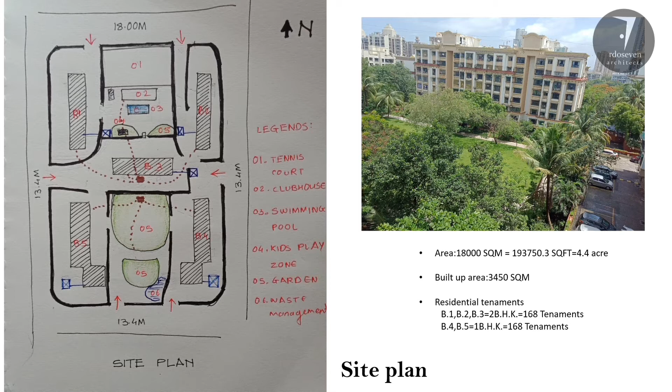The site area is 18,000 square meters, which is 4.4 acres. The built up area is 3,450 square meters on the ground floor. The residential buildings number 1, 2 and 3 are 2 BHK buildings with 168 tenements, and building number 4 and 5 are 1 BHK buildings with 168 tenements.

Now talking about the site plan. On the front side we have an 18 meter wide road, and on the other 3 sides a 13 meter wide road. At the entrance they provide different entries for different buildings.

At the entrance they provide a tennis court with a clubhouse area. Next to the clubhouse they provide the swimming pool, and 2 garden areas with a kids play zone and garden area.

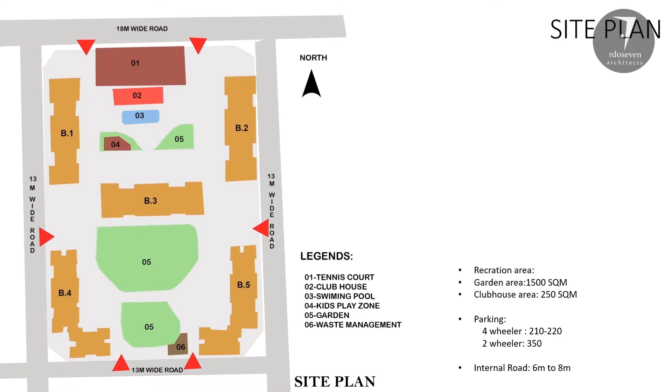On another side they provide a big huge garden area of 1500 square meters, which is 8% of the whole site. The total 4-wheeler parking on site is 210 to 220 spaces, and the 2-wheeler parking is approximately 350. The internal roads vary from 6 to 8 meters.

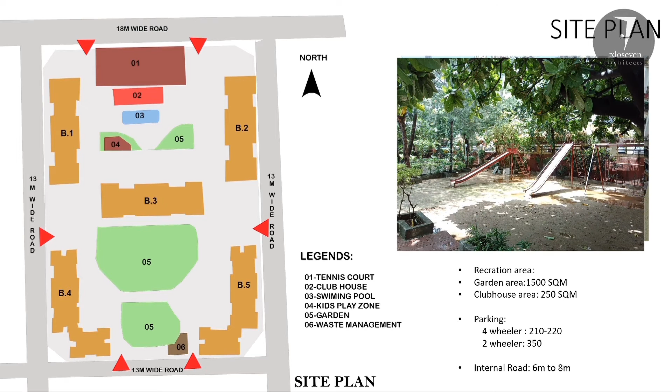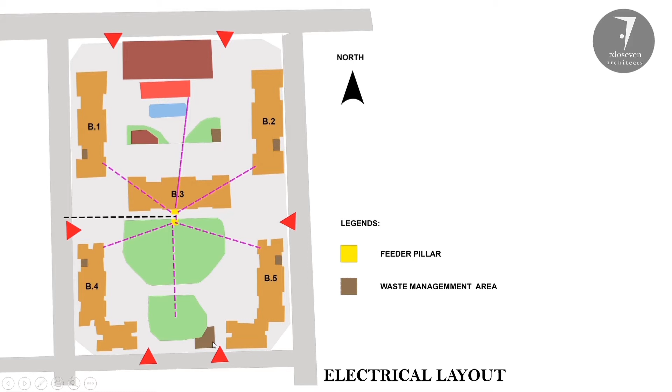Now talking about the water supply layout. Each building has an individual underground water tank, and rainwater harvesting is provided for building number 1 and the garden area only. The filter room is provided for the swimming pool area, and the OHT provides water tank for the swimming pool purpose also.

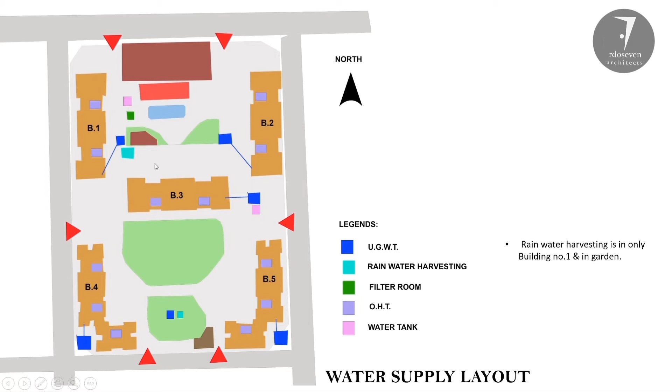This is the underground water tank of building number 5. This is the underground water tank of building number 3. This is the water supply of building number 1. This is the filter room of the swimming pool.

Now talking about the floor plans of 2 BHK building number 1, 2 and 3, they provide 2 wings in each. In each wing they provide 4 tenements on each floor. Total 56 tenements in each building. The building is G+7 height, which is 25.6 meters from ground.

72 square meter area for each flat. They provide 1 lift and 1 staircase. The electrical duct is 1 meter by 1.9 meters in size. In each building they provide the society office, meeting rooms, waste management area, electrical room and underground water tank.

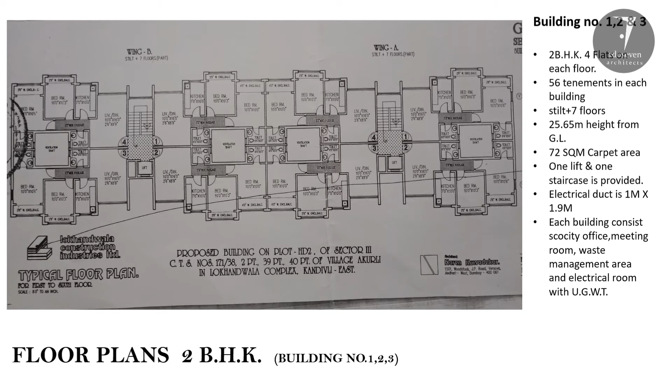This is building number 4, which has 84 tenements. This building is G+7 with 25.65 meters in height. Total carpet area is 56 square meters. They also provide one lift, one staircase. The electrical duct is also 1 meter by 1.9 meters. They also provide the society office, meeting rooms, waste management, and electrical room with underground water tank.

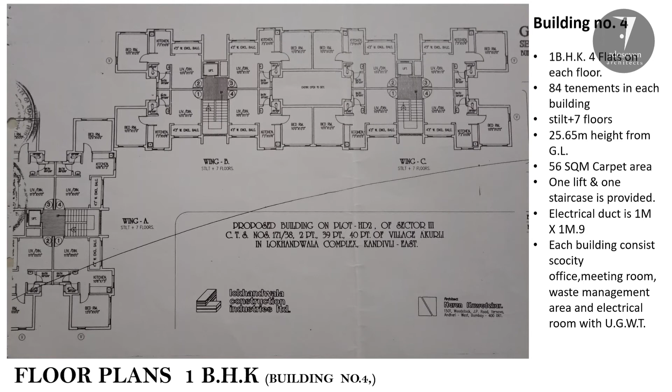This is building number 5, same as building number 4.

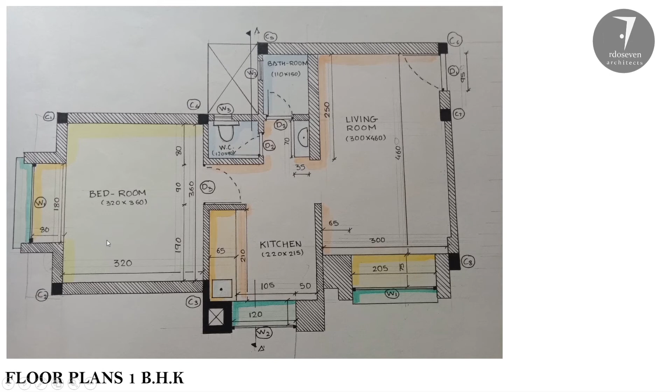This is a unit of the 1 BHK flat. This is the entrance with the living room, which is 3 meter by 4.6 meter. Next to the living room they provide the kitchen area with bathroom and WC. Next to that they provide the bedroom, which is 3.2 by 3.6 meters.

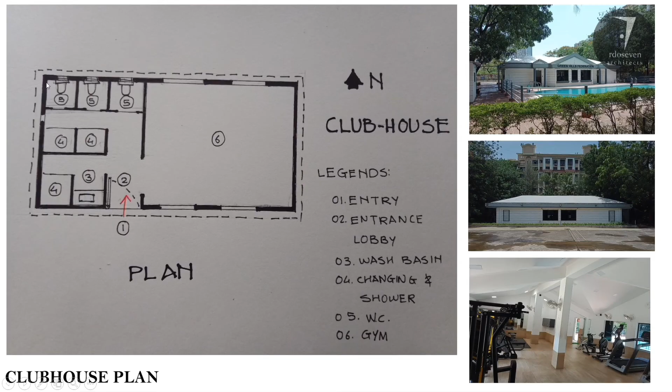Now talking about the clubhouse. The entrance of the clubhouse has a wash basin with 3 shower areas and dressing area. This is the WC area at the back side, and here they provide the gym as you can see in the picture.

These are some images of the gym area. This is the ceiling of the gym.